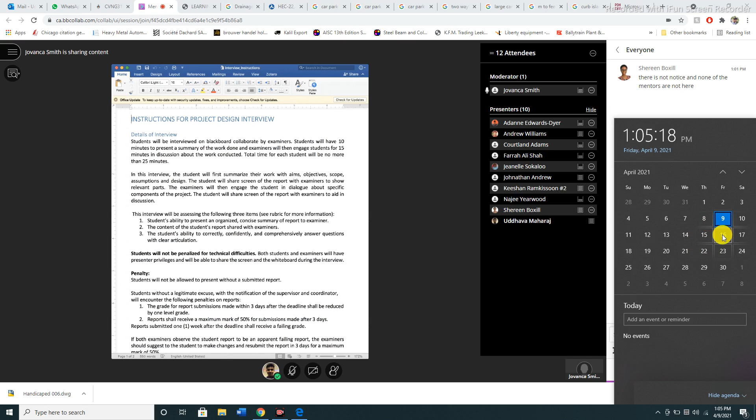So, of course, you have 10 minutes to present a basic summary of your report, by referencing your report. You're not asked or required to do any additional PowerPoint presentation or anything.

This is typically the format of the interview. You present basically your report to the examiners that will be examining you. You have about 10 minutes to do that, and then they have about 15 minutes for a discussion with you on your report, referencing your report.

So your report is an integral part of the process. Without your report, you cannot be interviewed. So the total time conducted would be no more than 25 minutes per student, right?

So I always ask and tell students to please look at the rubric for what you will be examined on for your interview. And of course, you should have been looking at the rubric as well for your report. Those rubrics have been available since the beginning of last semester.

In this interview, you will first summarize your work with your aims, objectives, scopes, your assumptions, and your design. You will be required to share the screen of the report with examiners and to show the relevant parts. The examiners will engage you in dialogue about specific components of your project as you share the screen to aid in the discussion.

The interview will be assessing the following 3 items: your ability to present an organized, concise summary of the report to the examiner, the content of the report, and your ability to correctly, confidently, and comprehensively answer questions with clear articulation, because it is an oral interview.

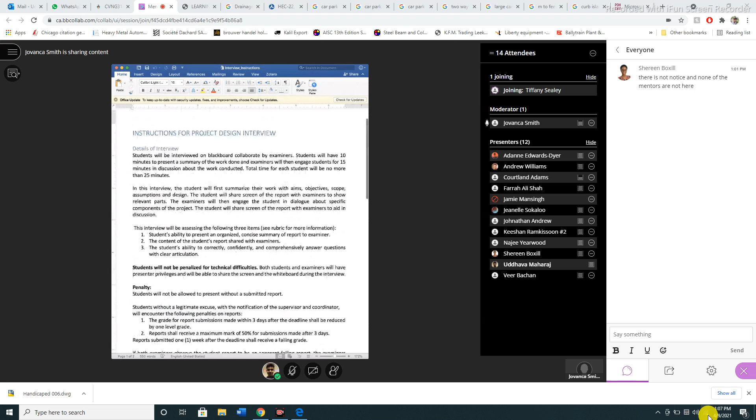So this is not new information to you, but let's note: students without a legitimate excuse will encounter some penalties.

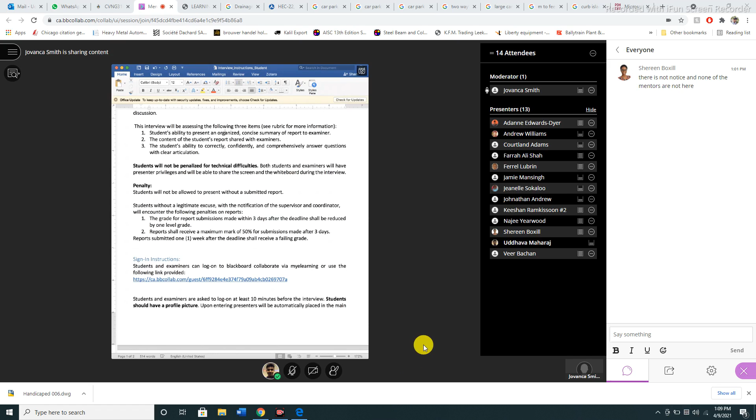You have the link there to sign in. You can also sign in via my e-learning. You are asked to sign in at least 10 minutes before the interview, and students must have up a profile picture. We must see who we are speaking with. So please, if you do not yet, please put up your profile picture.

Upon entering, presenters will be automatically placed in the main room, and the moderator will place the examiners and the students in the required test rooms. Students will be kept in the main room until the examiners indicate to the moderator or the student that the test room is empty. So you are not to put yourself into another room unless you are invited by the moderator or the examiner.

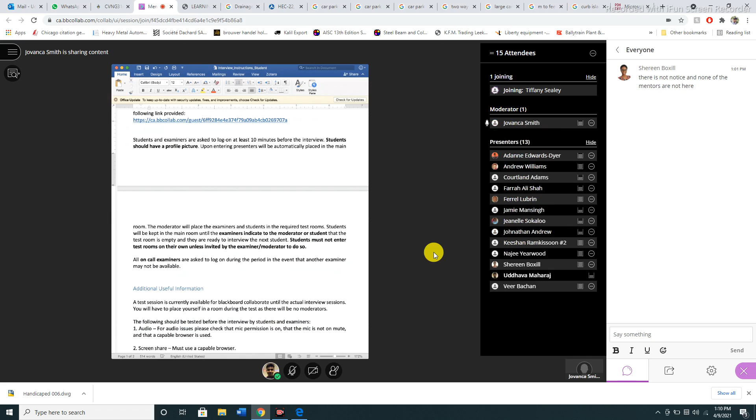Because what can happen, a student can be running late or an examiner can be running late, and you put yourself in that room and you're not ready. So once you log on, you stay logged in, and the moderator will place you in the room, or if you're invited to a room, then you can go ahead. But outside of that, you do not place yourself in a room.

So you should have a test session that is available on Blackboard for you to go and check to see how everything is working, how to maneuver everything, and ensure that your mic is working. Do not wait until the day of the interview to check if your mic is working, if you have screen sharing issues, and if you have a browser that is giving trouble.

So please check all of that. I know iPads and such tend to use different browsers, so please ensure all of that is working. Do you guys have any questions about anything here?

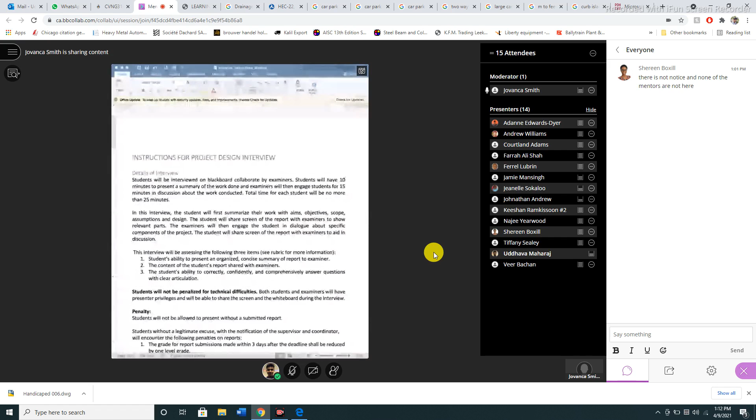Yes, Andrew. Hi, Miss. Hello. I was wondering, like, the summary, would we be able to pre-record that, or does everything need to be live? No, everything is live. The reason we say 10 minutes for a summary is basically you start up the discussion by introducing them to your project and letting them know what you did. So you're not allowed to pre-record it. It's very interactive. That's why we call it an interview, because it's a very interactive examination session.

Okay, makes sense. Thanks. So typically students tend to flip through their screens. Usually we are in class and you can flip through together. But since last year, because of the COVID-19 situation, what happened? Lecturers were just asked to flip and see certain parts and ask certain questions about the project. So make sure your project is your own and you can answer questions about it.

For students I know I don't think they will be logged on, but I'm not sure if you all heard anything—for students that are currently in St. Vincent or being affected by the volcanic eruption, I'm not going to contact them now because we're still in the middle of the emergency, but I will make contact with them later on, because that is a great disruption to everything.

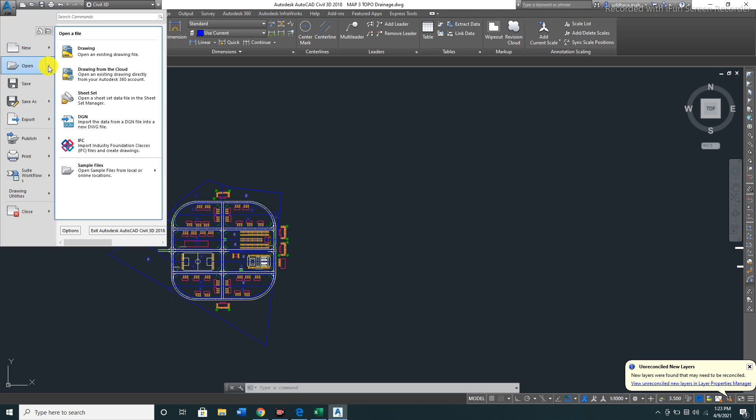Jamie asked me to let you know she's having some technical difficulties. Yeah, okay, no problem.

Okay, so have we all finished up? We're almost finished, we have a week again basically, maybe two. Yes, sir. If it is, you mind if I go and just start?

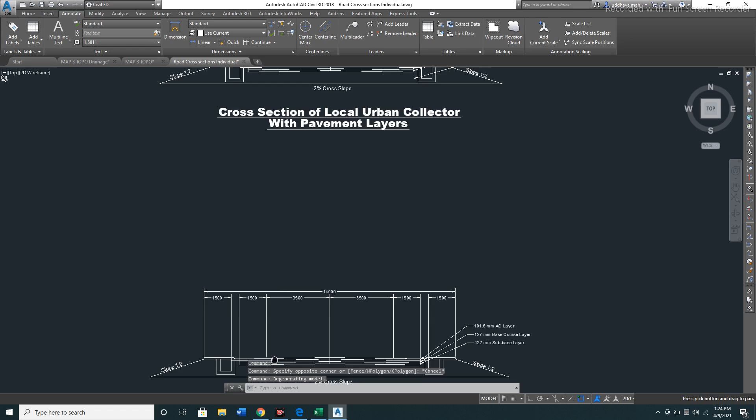I've started the bulk of my calculations with regards to the size of the drains. I sent your email, but I realized only later that you probably wouldn't have been able to open it because I did not send the surface file, the separate zip file. Oh. Yeah, I guess I'm not—I'll look at it.

So I'm going to share my screen now. Don't judge me, it's still kind of messy, I have to clean it up. Sure, what is that?

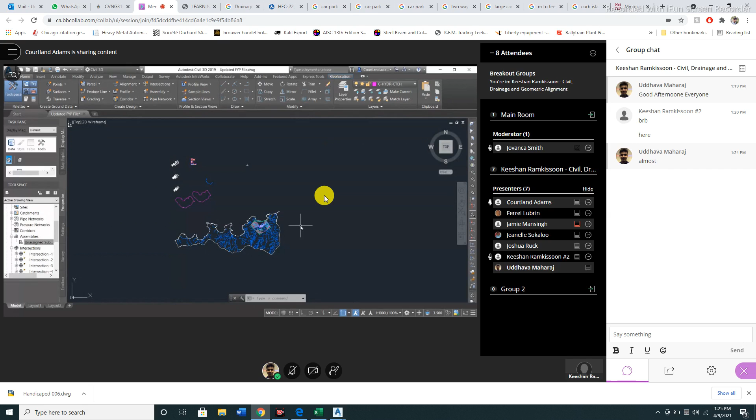I'm not sure, can you all see the screen? Yeah, I'm seeing it now. Right, so...

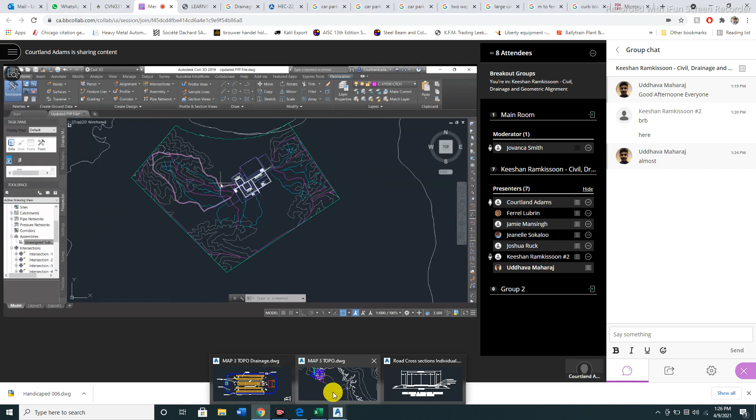One of my main issues was trying to understand this whole catchment thing, in terms of the entire catchment and sub-catchments. You can ignore the little blue lines. This large bit here, which I selected, is the entirety of the large catchment for the pre and post development flow.

I was asking my— sorry. Okay, let's stop, you keep breaking up a little bit, so it's kind of hard to understand. You're saying that is your main catchment?

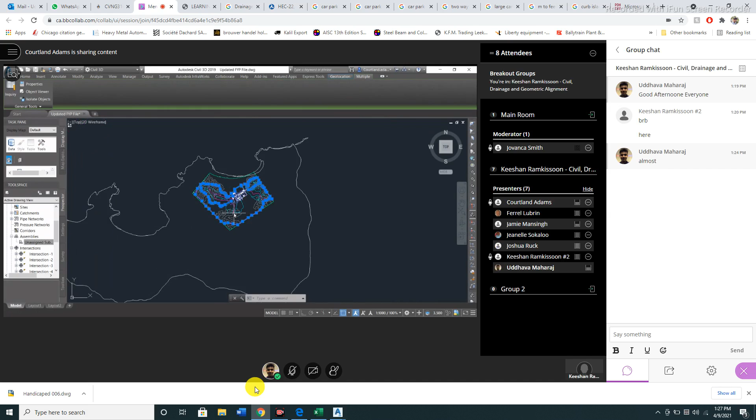Yes, the outline, just ignore the little piece on the inside. Yeah, the total catchment would be this. Zoom out for me. Sorry, where did the blue lines go? The blue lines, here with these. Oh, the rivers, just a second. Yeah, so how much rivers?

Right. But— one second, I'm sorry. No problem.

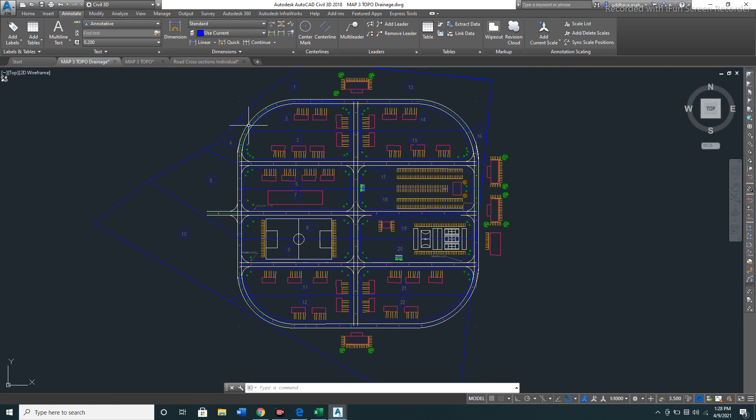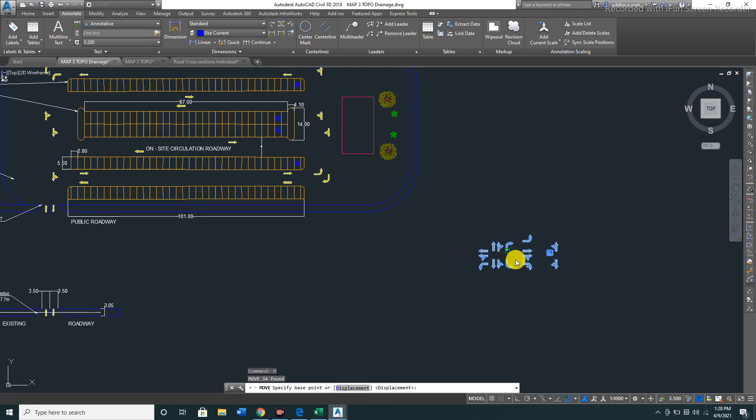But you're seeing those, it has blue lines extending outwards, it has rivers interacting with your catchment, with your site. So I just stayed within the borders of the surface I have. That's why you have a bigger surface.

The thing is, with the surface and the laptop, it's not working out. This surface here was done by Virginia, because my laptop could not handle the large surface, it just wasn't working. So she cropped it down to size, just for the area we were doing.

So I'm okay, not sure— but you can't say that's your surface. That's your catchment for your entire site, because there's rivers outside that area, and so your catchment would extend further.

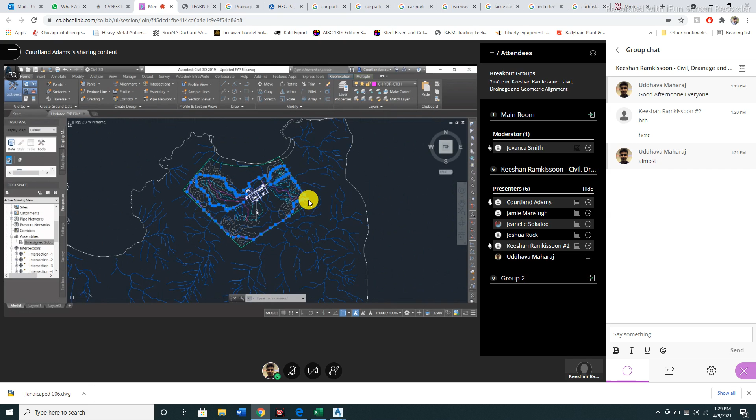And there's a number of rivers, in fact. Because I did ask— I remember who did Stonewater Park for the feasibility aspect, and she did indicate that it was really small. So I wasn't sure what to make of that.

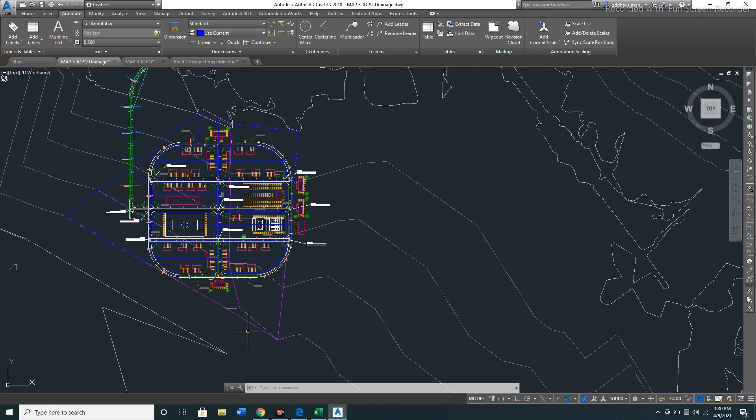Where's North Coast Road here? Do you have that, the Fairfield North Coast Road? Yes, just found that earlier. So this here would be North Coast Road here.

Okay, well, you're going to have a major problem. Well, it's kind of late in the game for this, but right now your site has Rincon River running through it.

Yes, that was— another thing, because even if I try to reposition it, it's going to be a lot of problems. I remember last week when we were discussing the rivers, the option was to either divert or to include it into the drain. Because of the size, I'm assuming that this river here and this river here as well would be two large rivers, I opted to just divert.

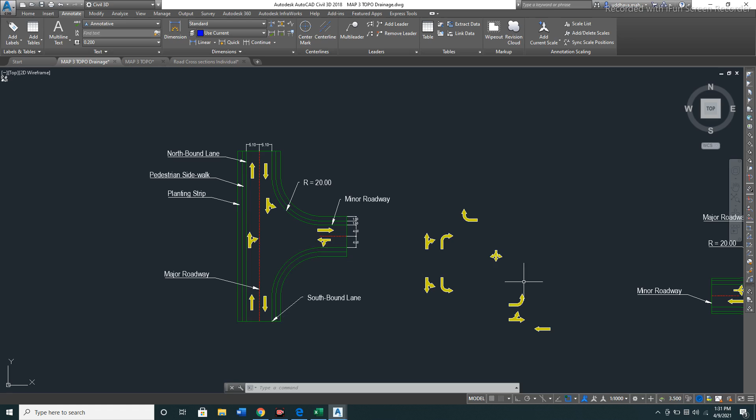It's another question that I'm waiting for my supervisor to answer, regarding if I'm actually supposed to do back calculations for that, or if I could just have a section in the report of what's actually required to be done, and have that as one of the main pieces to be done for the site.

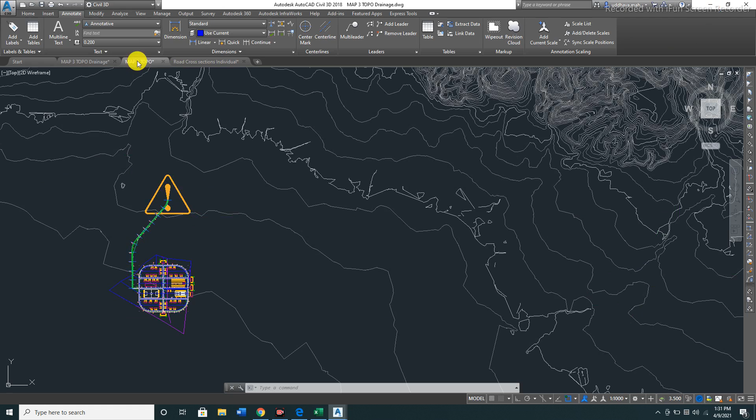If I'm allowed to do that, I would propose we direct this piece here towards the north of the site, and this river here just east of the site, where the detention basin would have been in this section. And that just goes into that river.

Just remind me again what you're doing with Rincon River. Would that be this major piece here, right? No, Rincon River is which one? I thought this one was going to be it. Go by the main entrance to your site. Oh, this one. Yeah, that should be the main river.

All right, this would have been diverted along the east of the site. Maybe if you're putting calculations for that, or however you're doing that, sure.

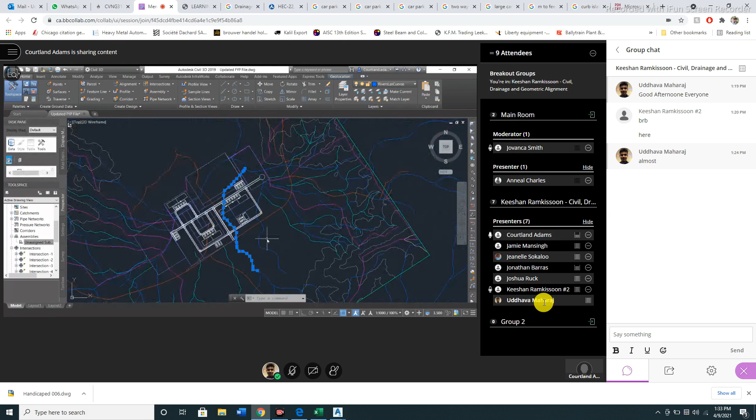But your site selection, you should have avoided that as much as possible. Too late for that now. What else? Regards to the site, I was trying my best to stay away from the mountains, in terms of the amount of excavation that would have had to be done, and also the massive change in flow that excavation would have caused.

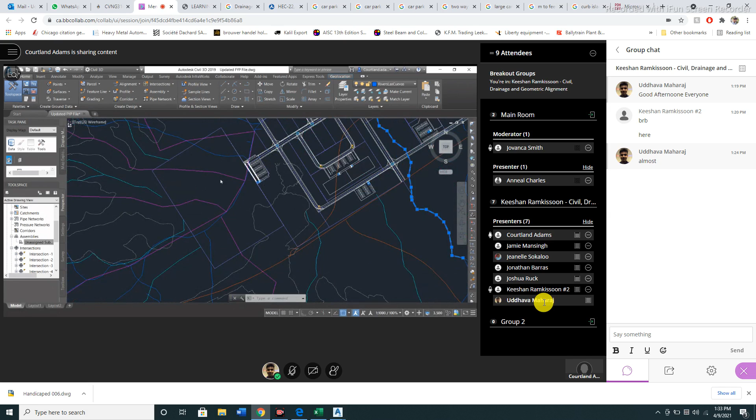So that's why I tried my best to stay, because initially the site was more outwards, more towards this area. Right, but there's just a lot of mountains here, and we do have a planned recreational area on this side, which still requires some excavation, as well as a recreation area on this side, and then also still excavation for the two apartments up to the north of the site.

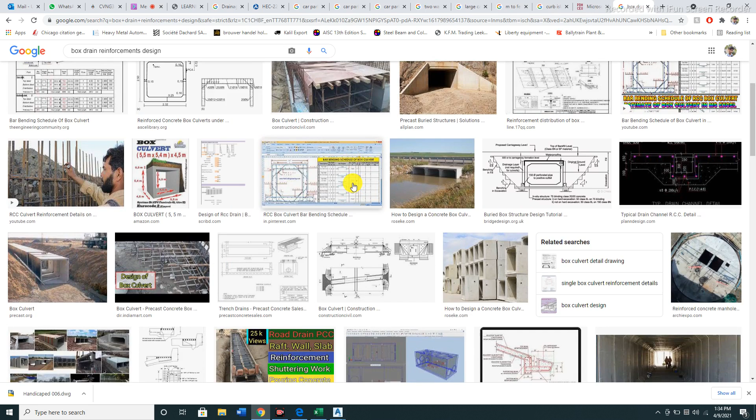Right, next thing. I guess I'll try my best to see if I may have some computer that will be powerful enough for me to render the full surface. I mean, probably, yeah, or even in ArcGIS, I'm not sure.

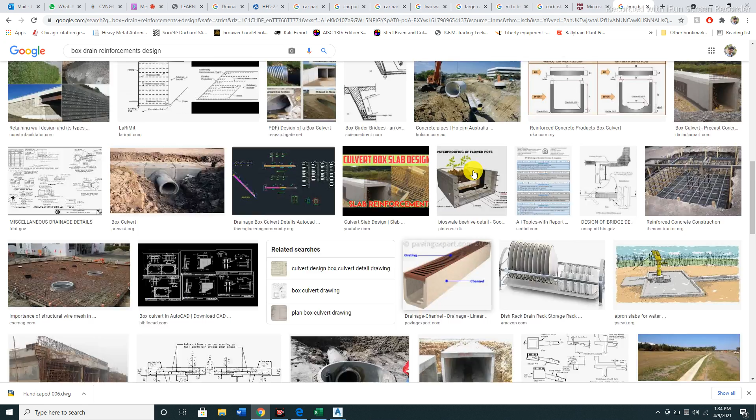If your computer is having problems with this, that's a tough one to fix. I tried it last time, with both my laptop and the remote connection we had at school, and both of them were having issues. We were both struggling to process this stuff. My laptop took several hours just to produce the surface on the map, and same thing with the remote connection to the desktop in school. That sucks.

We have a little issue with the catchment there that I don't know how you're going to solve if you can't get it to load. But even so, show me the minor catchments.

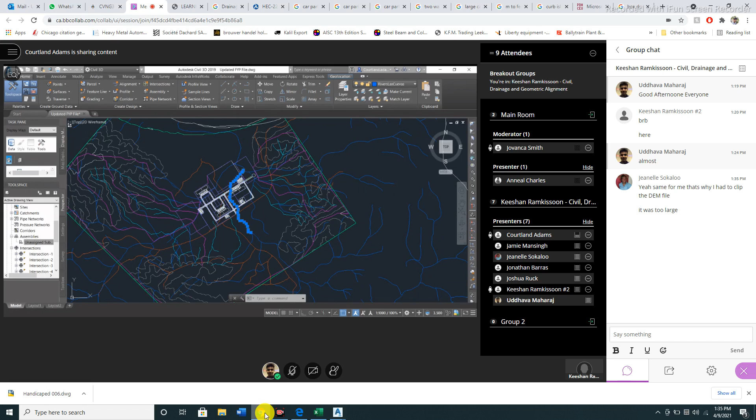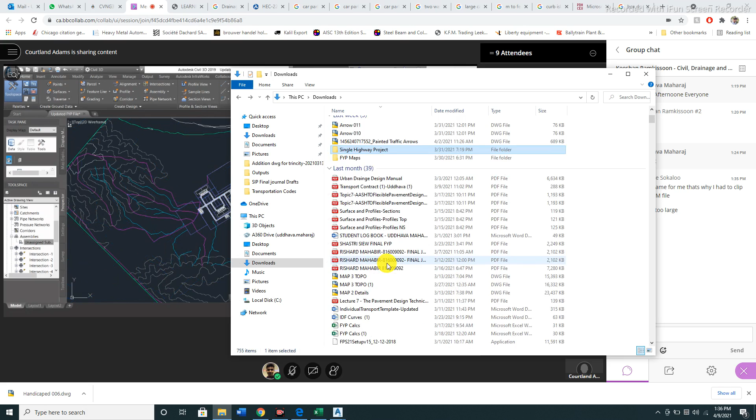Not already here. Right, so this was another bit that was kind of confusing. I thought it would have been easier since the site layout is pretty simple, but it was just really confusing.

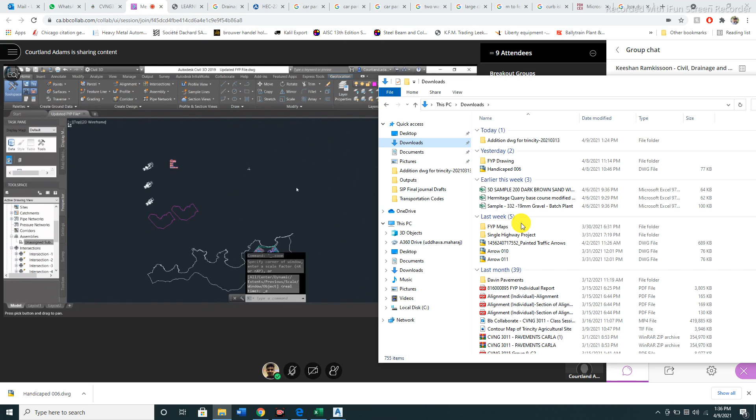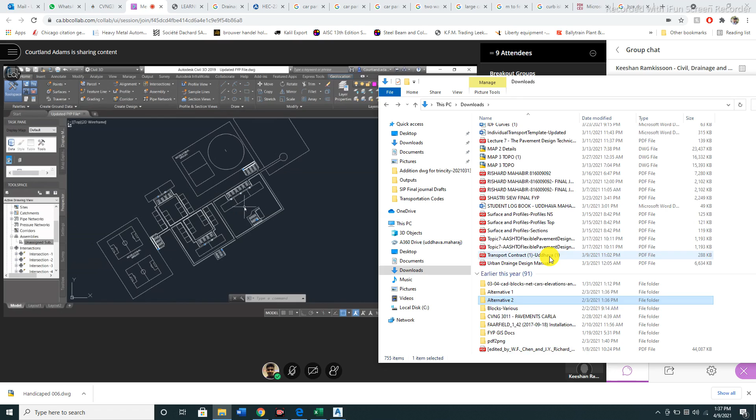Right, so this is - oh my goodness - this is the design of what we actually have for the 500 occupants, the actual site, so we have areas along here, here, and here that are earmarked for future development, right? Okay, so I included that in the definition of the subcatchments for these sites.

So this is what I came up with, and I'd like to note that this side of the site, sorry, is higher than this side. So water will be flowing from west to east, right? Well, southwest to northeast, right? And also this side would be higher than this side of the site.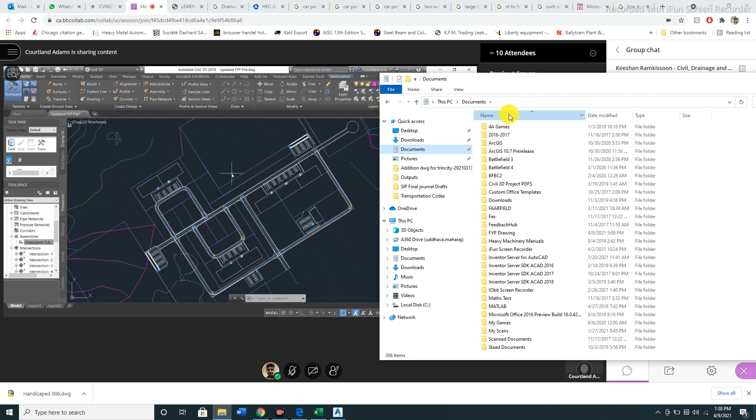So what I proposed is that this point here, this point here, and this point here, along the alignments, would be higher than the other aspects of the alignment, so water would flow from here to here and come out from this side. Same thing for here and here as well, so all the water would be drained along this main collector, which would be the main drain. Okay, sure, that's no problem.

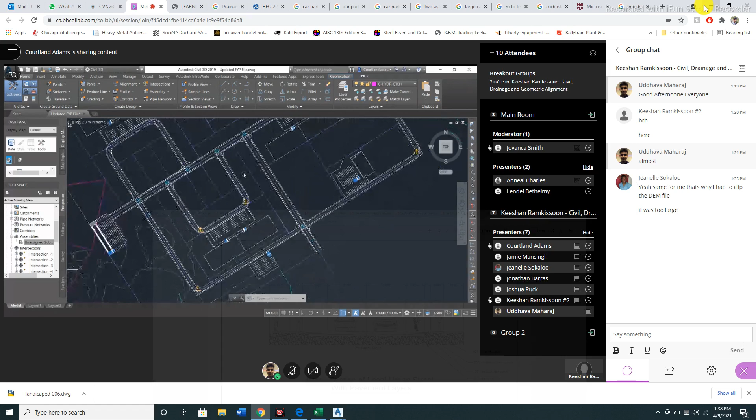But yeah, so I'm just not sure if the placement of the catchments is making any kind of sense.

I'm not sure if these subcatchments, how I did them, made any kind of sense, because it's kind of a little bit confusing to do. So that little middle piece in there, right there. Those blue lines are your subcatchments?

Yes. Okay, and what is in between those blue lines? What is there, what is supposed to be a building? All right, so build this side and this side of houses, and this area here is supposed to be a green space, basically.

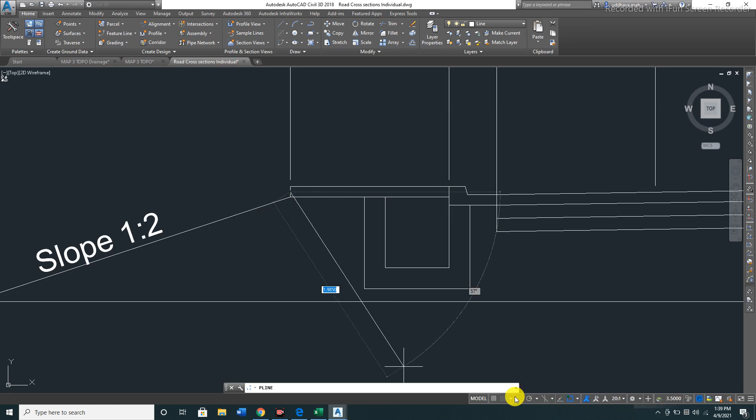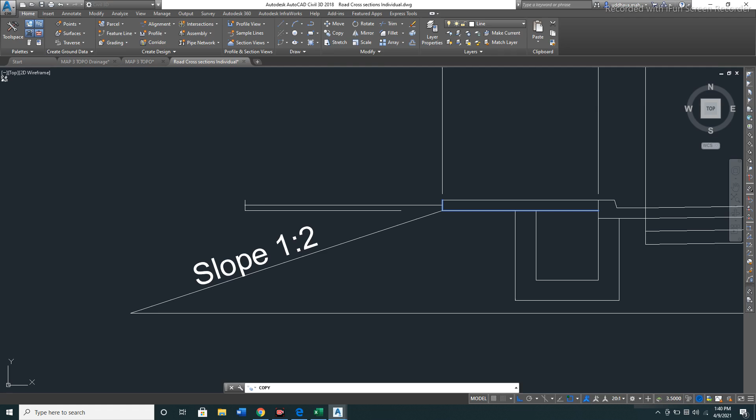Okay, so what I had, I was thinking that you have the drain or grass swale behind the buildings. Water will flow into those swales from the green space, and also here as well before it goes into the main drain, into the drain into the street, then into the main drain. At least that was my reasoning behind this.

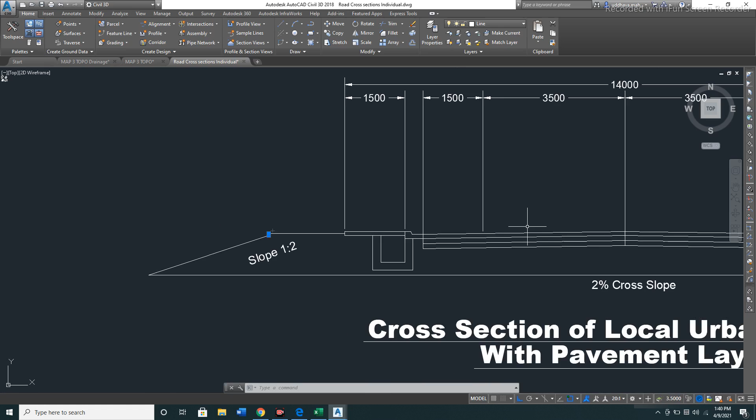You worked out your elevations to ensure that you have those catchments draining to the right areas, right? Rather than to the right spots. Not the road one, but yes, the internal one.

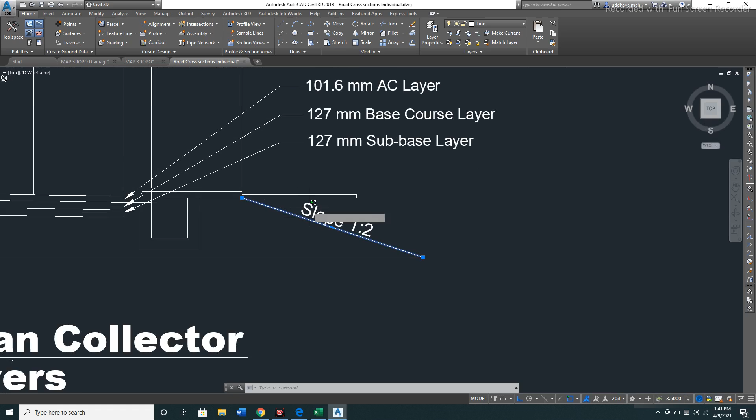The details of what the grading for the site itself is. Yeah, the grading for the site. I have some calculations, no, the elevations I have is based on the elevations I have for the roads, and basically, at least how I hear it, on paper at least it makes sense. It will flow how it's supposed to flow. Okay, just okay, not with this site here.

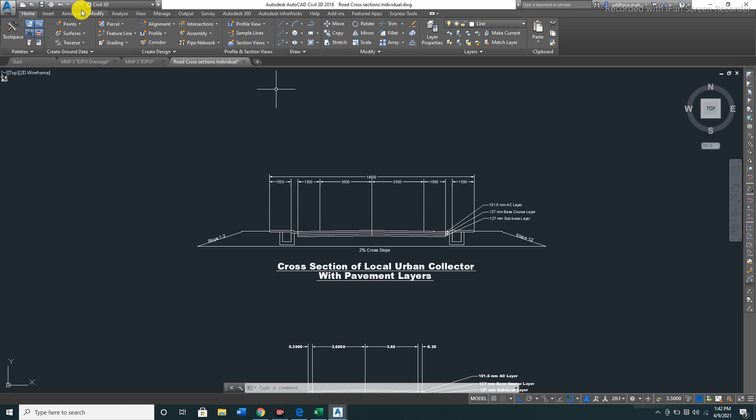All right, next question I had. I see in the contract we have the drainage layouts and profile design for all main drains, showing elevations of inlets and outflow at the site. I just wanted to clarify that main drain, at least for my site, will just be this singular drain where everything's collecting, which collects all the water and then carries that to the detention. It said only main drain, or is

it all main drains? For item 10 it says drainage layout and profile design for all main drains. So we do have to do the peak estimations for all the drains, but the drainage layout and profile design of all main drains, I wasn't sure if that means all main drains, or if at least on my side that main drain would be this straight in.

All right, let me just pull up that contract to confirm that. Let me see what it says. Yeah, it's objective 10. Okay, one second.

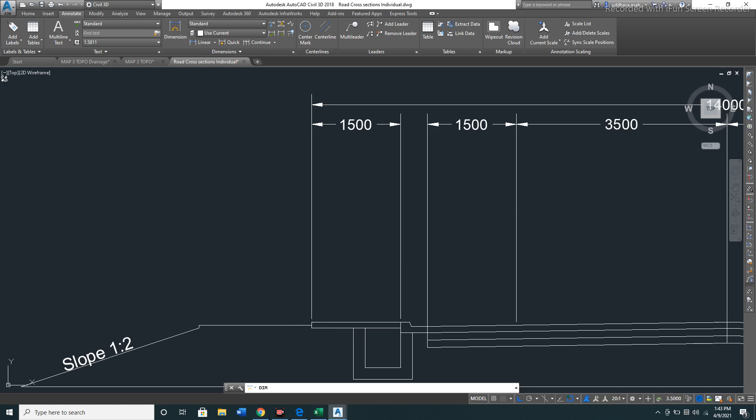All right, drainage layout of all main drains showing elevation. Right, no, so all main drains should be all the drains within the site, like that's all the box drains and all the ditches, not the curb I suppose. Yeah, so that is what that should mean to me. Any big channels? Right.

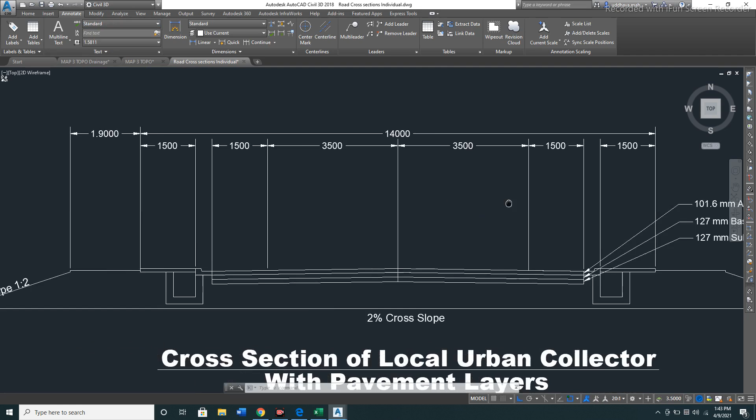Okay, clarification, the last bit. For the drainage for the car park, that will just be mainly the grading of the car park and where all the water will flow out. Yeah, exactly. So car park drainage, because it's a flat area, you want to make sure and have your elevations shown on your car park and your flow arrows as well to show where your car park is draining to, right? And then you'll have your drains at the edges of the car park to take up all your discharge.

So zoom in on car park. All right, car park, sir. All right, this is the one. So where are your drains? I have to modify. Right, so where are your drains? The main drain would be, because of how I plan to have it graded, would be on this side. It's slightly sloped from southwest to northeast.

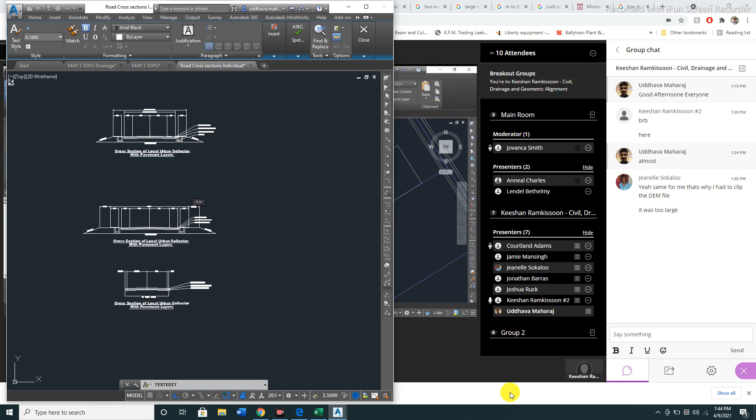Okay, well, mostly what you want is to avoid having a big collection area with overland flow. So you might want to put a drain in the middle or somewhere else, closer to the middle, so that you break up that flow path. Because if you're draining from the bottom left end to the top right end, you might get too much water flowing across the surface of your car park. So that's just something to take into consideration.

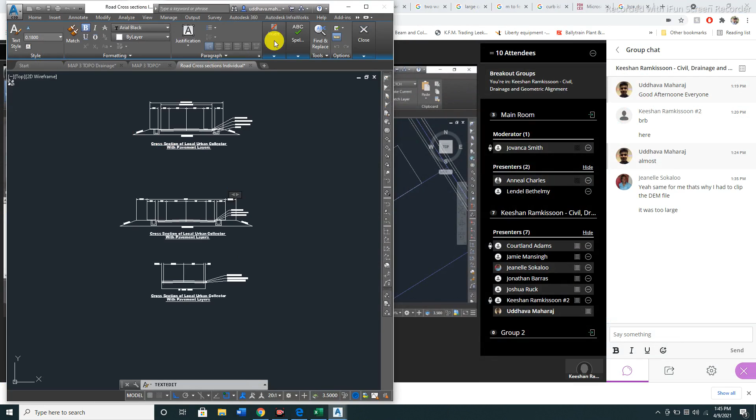Last question. Okay, I have two more questions. I know I have to modify this car park. This is the largest one, so this is the one I'll have to design.

For the layout, my main concern was the turning and maneuvers, because these spaces here are for a single truck, but it's just like a general services space for any large delivery truck or garbage truck to park up, right? My main concern was basically turning.

As well as this corner here to exit. So I know they have it in areas for 16 meters, and I think that's a bit much, at least just for a car park, especially when going extremely slow.

Sorry, what radius were you using? 16 meters. Oh, 16. Okay, but 16 is a bit large as well.

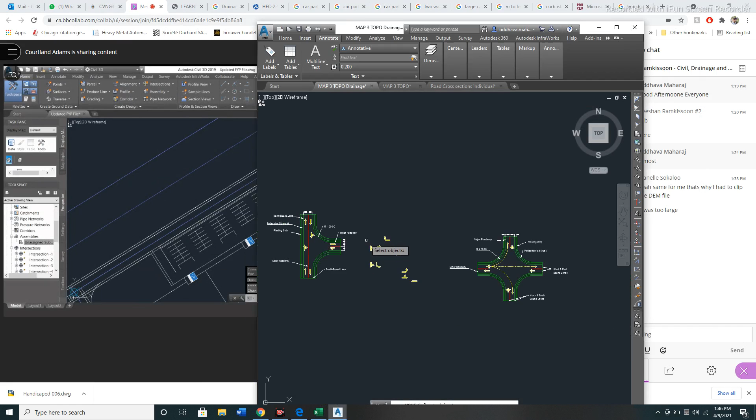Look back at the AASHTO chapter on intersections, and you would see something more appropriate. I think you could design it for a car, a truck, or a small truck in terms of that turn radius, that outside radius. Because you do expect trucks to be in there, it should be fine if a truck every once in a while goes across into the next lane as it makes that turn.

All right. And well, in the email I sent, I let you know that I kind of gave up on the whole roundabout situation because that was just confusing. So I'll just do a regular T-section.

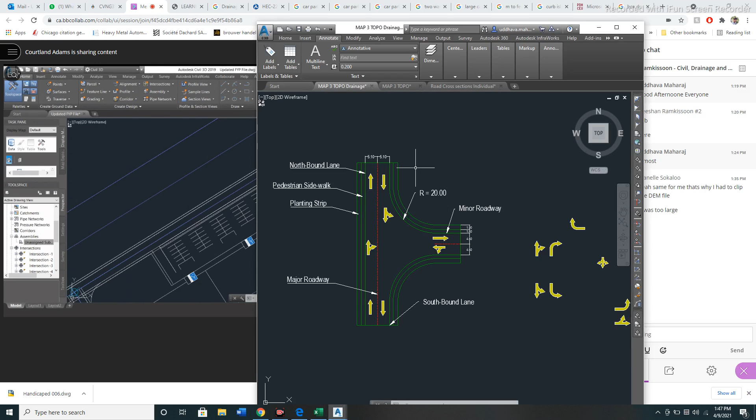I do know that I have a dedicated right turn channel from the North Coast Road onto the minor, and left turn pockets from the minor, and from the major again onto the minor. But I do know normally when you have these channels, you have a little section with grid lines.

I'm looking in the road markings book as well as the AASHTO book, and I'm not seeing anything in terms of the dimensions for that. How am I supposed to calculate dimensions for that, how long it should be? I'm not hearing you properly there, could you just repeat what you're looking for?

All right, so for the T-section, I do have channels for the right turn from the minor, from the North Coast Road onto the side, and left turn again from North Coast onto the side, right? Now that'll be the widening at the intersection itself.

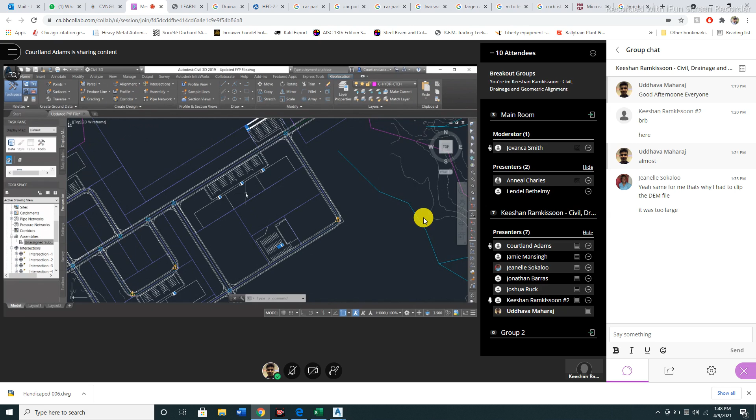Let me see it, I haven't drawn it properly yet. I'm still fiddling with it. Where is it?

All right, so it's a little something I was doing here, right? So let's just say this is the intersection, right here. Okay, yeah, this is going into the side. You normally have like this little box.

Oh my goodness, great. Let's say I have a little box here that basically separates the eastbound lane from the westbound lane, and also prevents cars from basically intersecting the right turn pocket from the major. Yeah, okay, right.

This bit here, so looking at the road markings and signs book, I'm not seeing anything in regards to how long this bit's supposed to be, how wide it should be. I'm assuming just as wide as the lane here. But I'm not seeing anything in terms of how I'm supposed to design that bit. Do you have any recommendations?

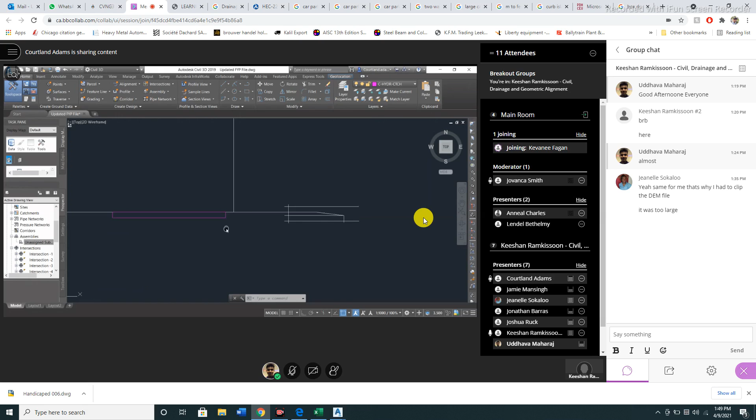Okay, so what I want to do is to pan right. Yeah, okay, so basically what you want for that end, the right-hand side, you're correct. It should be the width of the lane that you're trying to match.

That is on the opposite end of the junction that you're trying to prevent people from going towards from the opposite end. So all you have to do to end that is to make sure it has enough taper at the left-hand corner to get back into a proper two-lane.

So basically, I don't know the length offhand of what you would need from the right-hand vertical line of the purple, which is close to where your stop bar would be, I guess. I don't know what length leftwards you need, but to get back into your two lanes, just check back the taper lengths. I think it's either 1 in 15 or 1 in 10 or something.

So to get back into your two lanes. Okay, so actually it should basically be the same thing as the taper length to get from two lanes into the pockets, into the turn lane, yeah. Yeah, because I think I used 1 in 8.

I think that one in, how much was it? A short 1 in 8. Or was it 1 in 5? Yeah.

So basically, use the same thing for the other side. I'm sure the length doesn't have to be the full width, shouldn't have to be too long, because it's cars heading westward that I need to prevent coming into the next lane. So I don't think it matters too much, but you could double check AASHTO for that, or check back the intersection guide. If you don't see anything, just use your best judgment. Okay, no problem.

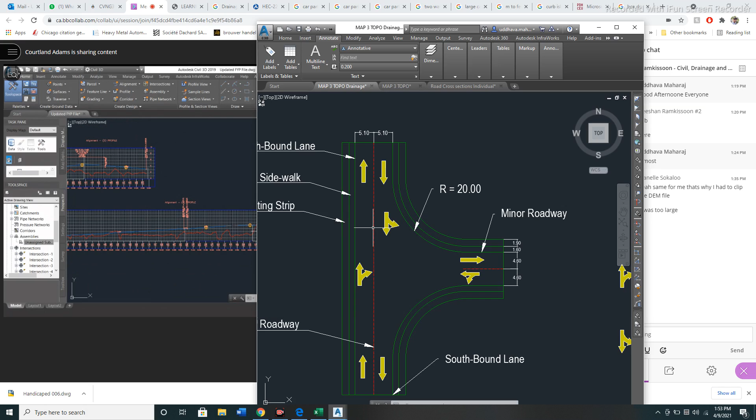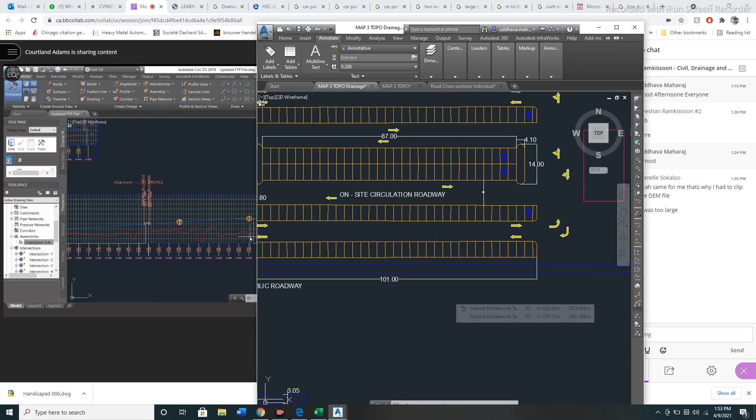No, it depends on what you need to grade your side. Just make sure if you have to keep to the minimum slopes, that should be fine. If you end up with those high cuts and fills, try putting in some more low points and high points - try undulating the profile a little more, as that will help in achieving the minimum slope, while making sure you don't rise too much on one side. But again, you'd have to change your drainage for that. So it's a balance of what you need, whether to focus on the drainage or work on your cut and fill.

Okay, all right, I think that's it for me. Okay sure, no problem, thank you so much. Yeah, and I'll try to respond to email this weekend also.

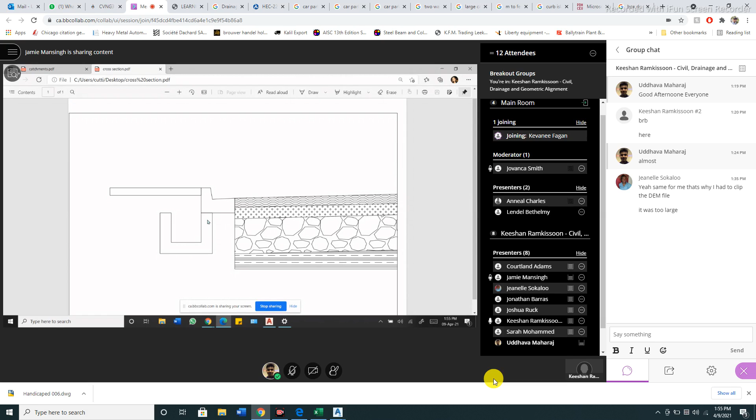So for the cross section, is this how it's supposed to look under the sidewalk? Yeah, generally, yeah. What you would want to do is...

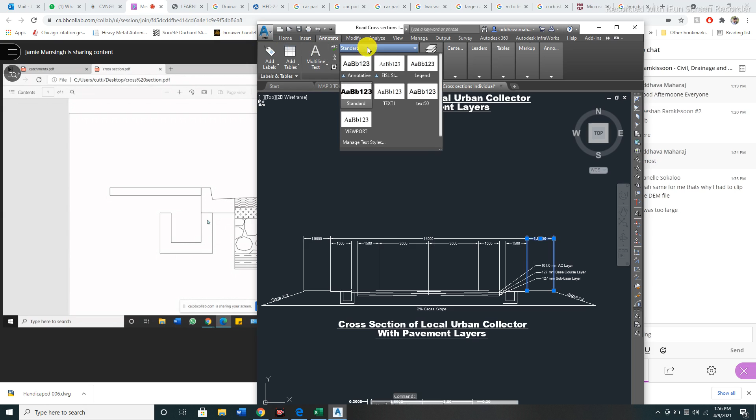Could I control your screen? Could I control? Hold on, one second. I don't think I could hold on to your - I don't think I could control your screen. I don't, oh yeah, I'll just have to point you in there.

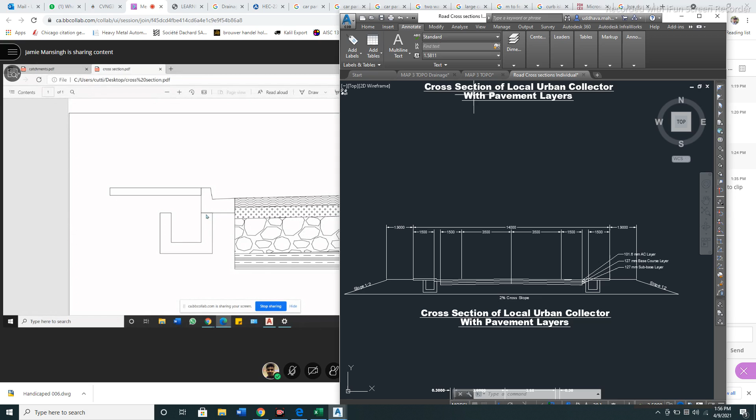Okay, so right under the curb where you have that box drain, right? Yeah, so move your cursor to the left, that area right there. What you would normally do in construction is build that wall as one, so you won't have a separate curb wall to a box drain wall. So you'd want to remove that line between the walls of the box drain and actually put a vertical line up between the edge of the box drain and the front face of the curb. You understand?

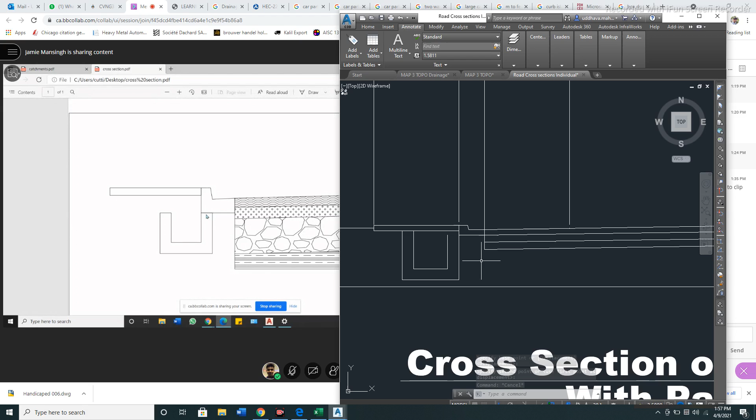Hello? I think I lost you there. Yeah, shucks. Okay, well, until Jamie comes back.

Yeah Joshua, yeah go ahead. Hear me? Hello, can you hear me or no? Very softly, all right, I'm just trying to raise it a little bit. Any better? Slightly, you can raise it up a little more. One second. Any better? Yeah, this is better now.

Okay, all right, so my issues still remain the same, kind of using the laptop or whatever. But my question for you was, in terms of my parking, I'm doing the grass pavers. So when designing a section of the parking, would I design it like pavements and then just put the grass pavers on top? Or is there a whole separate design for parking with grass pavers? There's usually a separate design for grass pavers.

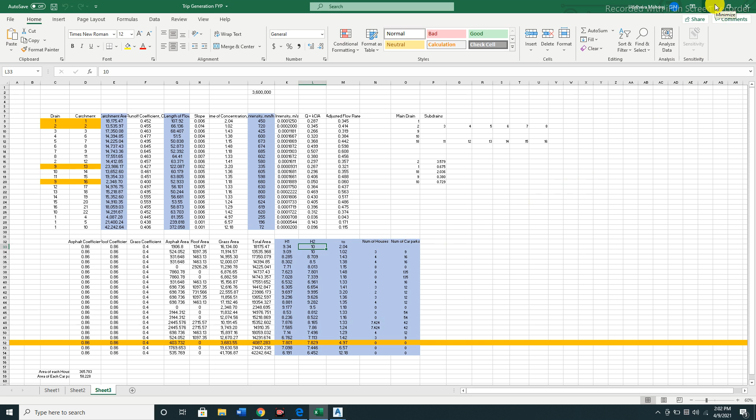So it is a bit of a different process. I understand what you're trying to do, but talk to the supervisor about that, because it might be complicated if you don't have the correct values for your design. Okay, yeah, I would ask her about it, see what she says. But that seems a little more complicated than your regular pavement design, your regular asphalt or concrete design. You sure you might want to do that still?

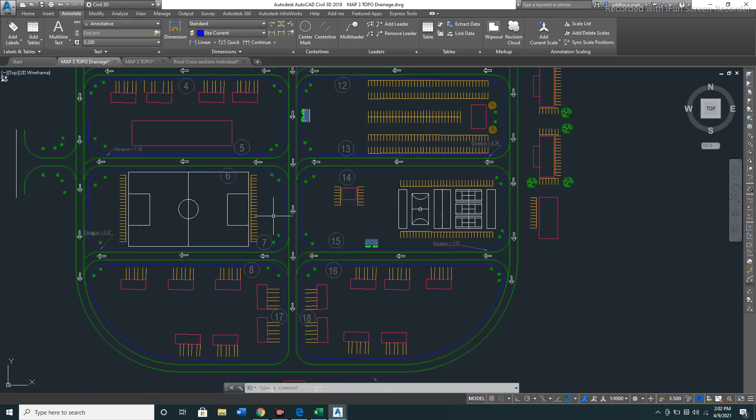Well, yeah, that's what I was now thinking, because if it's more complicated, then it's just best to leave it out and design the asphalt or concrete design to substitute it, because those are a whole lot easier to design than these to begin with.

Yeah, but if you want to do it, talk to the supervisor first to make sure you could do it, that you're allowed to do it. Grass pavers are a nice concept, said that before. Of course the maintenance is the issue, but just make sure for your project whether you're allowed to do it. Okay, no problem.

Another question, not so much a question. Sorry, Joshua, hold on. Jamie, I saw you come back, but we're just going through with Joshua until I come back to you, okay? Yeah, okay, no problem.

So I use the green book to design the intersections and stuff like that. But in my initial design, I realized it wouldn't have worked because of the spacing, because I have two roads side by side. I'll show you when I have access to the laptop again, but it's basically a T junction and then a four-way crossing, not directly next to each other, but there's two roads, one forming a T and one forming a four-way crossing. So I told myself I have to increase the distance between the two roads to properly account for the turning points in both intersections.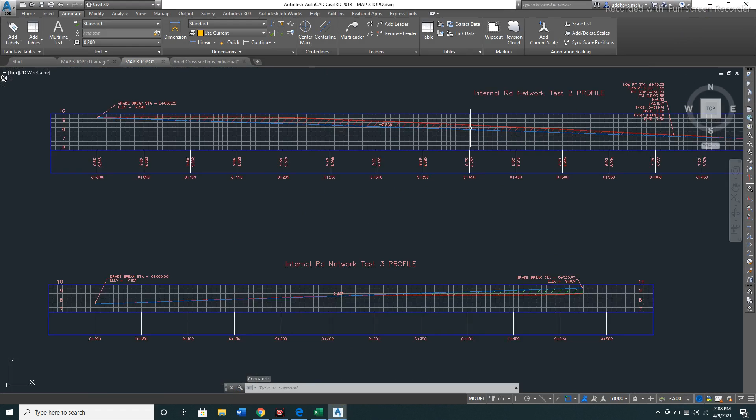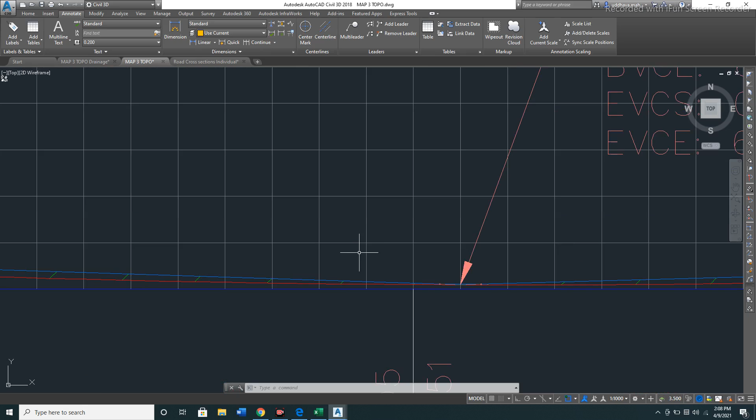So he may run into some problems with that. Okay, because if I can remember, I have all the rivers and stuff like that. So then you say it's best to increase, instead of limiting yourself to the small area, open it up to the full size of the catchment and work with that. Yeah, because if you're trying to work out your flows within your rivers, you need your proper catchment size, otherwise you'll underestimate your flows.

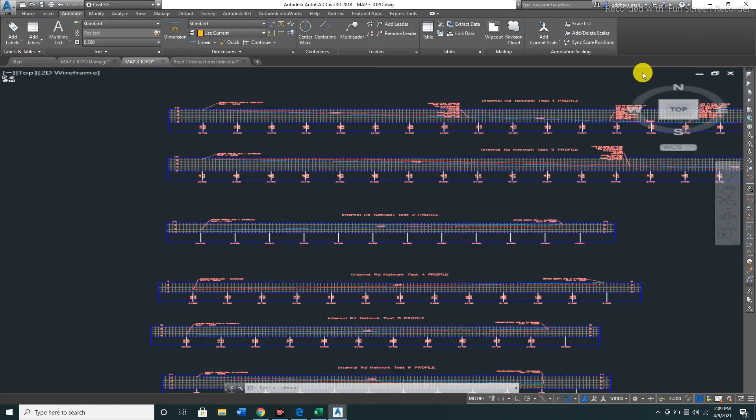But what I was going to do for the tributaries, where they join, I was going to put kind of like a water feature, not a water park, but a small design so I wouldn't interfere with it in terms of construction. I would just leave it like a natural habitat with trees and ponds, or maybe a pond, to just not have it utilizing my site. And for the areas I can avoid, I was going to put applicable bridges.

Yeah, that's fine if you want to leave it natural, that's fine. And as you say, a water feature, it could be a kind of park as well. That's cool, that's no problem.

Okay, and then in terms of where the rivers cut the roads, where my potential roads would be, would it raise the road, or would it just put a bridge? It depends on what.

I mean, this is a whole different topic altogether, but basically all you need to do at your level is make sure the structure you're proposing could accommodate within your road profile. So say you have a...

Hold on, let me get back onto the... hold on one second. No problem.

Right, okay, let me go back onto the screen and draw this. So this is your plan view. You have a road here, and a river here, and your road is this. So that's your plan.

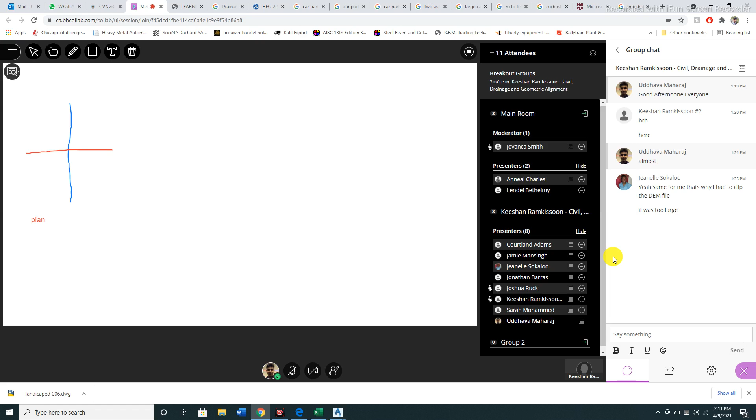So now you want a section, or maybe a profile of your road. Right, so you have your road profile. No.

Sorry, hold on. Right, okay, yes, let's say your road profile is that. So your river channel - let's say your existing ground is something like that, and your river channel is like that. Making sense so far?

Colin? Yeah, okay, so now you need to do a structure, right? Let's just say it's a box culvert or pipe culvert. Sorry.

Is there a way to erase without clearing everything? Okay, let me draw back that shape. Right, okay, good. So your crossing is now that box culvert, that black rectangular shape, right?

If your road profile doesn't need to change to accommodate that structure, and that structure could accommodate the entire flow you calculate for that channel, then that's fine. But let's say, for example, this shape thing is not - say, for example, you needed that.

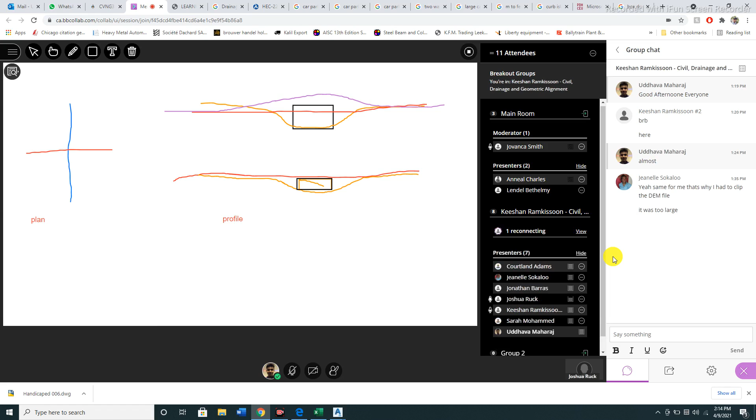Okay, makes sense, yeah. But I think that is it for me for now. Okay, yeah, thank you very much. Sure, and then you keep sending any things you have later on. Yeah, no problem.

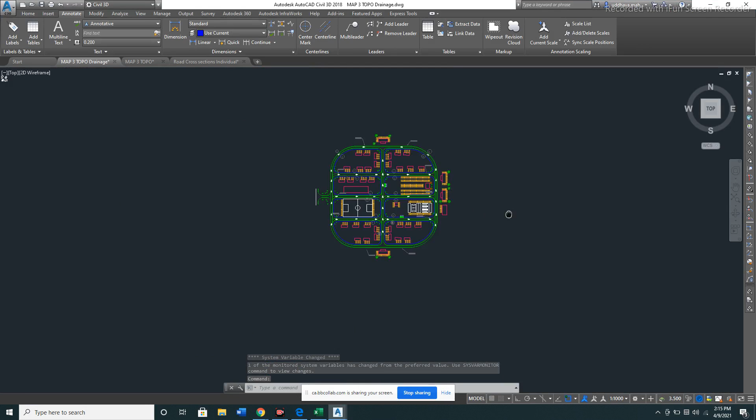Right, Jamie, is Jamie there? No, she's not there. Okay, anyone else? Yeah, that one, go ahead. Hi. Just give it a little while. Oh, okay, yeah, sure. Oh, okay.

Okay, yeah. No, it's good, yeah. Make sure and have your stop lines. Yeah, that'll be important, yeah.

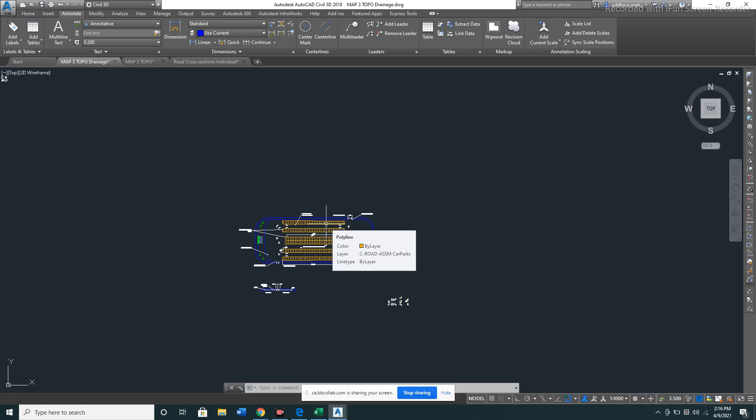Okay, just say that again. Your nose width for what? Your median? Sorry, I'm not understanding, you could just sketch it out there for a second. Let me just see what you're talking about.

Right, yeah. Hmm. Oh, yeah, but that's simply...

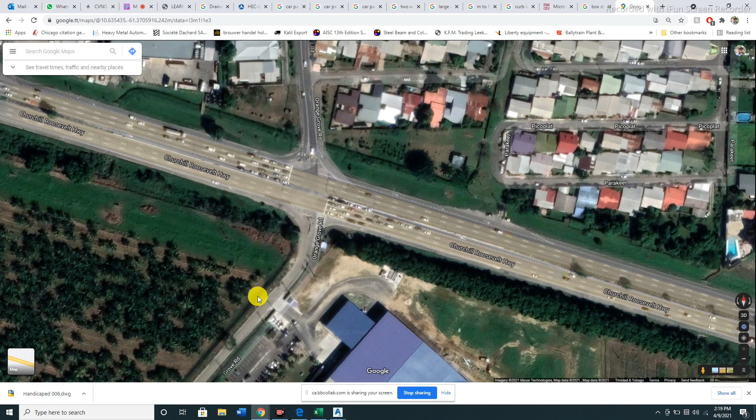Yeah. Right, yeah, hmm. Yeah. Yeah, sure, try to make it as practical as possible. So -

If you go up on Google Earth, instead of Google Maps, you could actually try to measure off the distances and see most of those lanes for the highway are 3.6. The median should be about 2 meters or so. So you could use that as a standard.

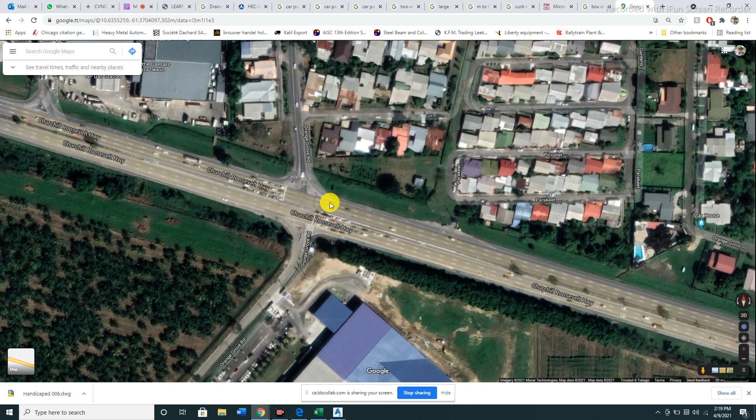No, no, it's 3.6. 3.65, yeah, but you could use 3.6 generally. If you look back at your AASHTO, your freeway or arterials, you would see the recommended road widths for your type of roads. And usually it doesn't go more than 3.6.

Yeah, it just depends on the size of it.

Yeah, that could be a big run for having overland flow, because you really want to control that. The one thing I hate when you go in car parks or other flat areas is you have to be walking through puddles of water, especially when it's raining, to get to your cars.

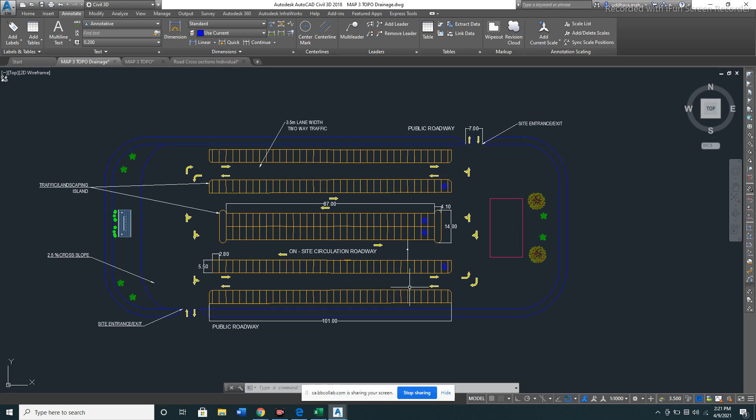So you really want to limit the amount of flow you have. So maybe a middle drain could work out better also. Yeah, if you want it. So just again, it just depends on how much flow you have going in towards your drains at the outer ends and what distance.